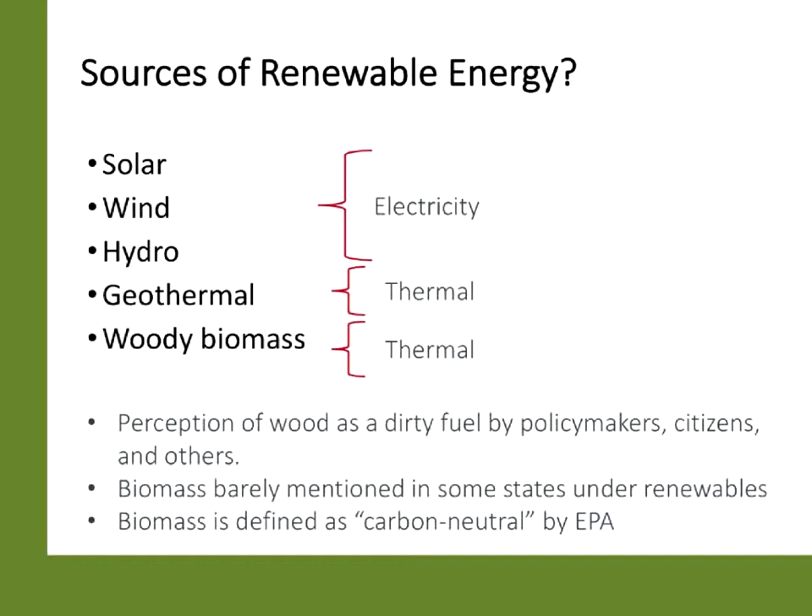So I have a question for you all, and I think Bob can facilitate this. Do you heat with any of the following? I encourage you to mark any of these if you do. I'm not sure if there was a poll actually set up on this or not, but these are kind of the options that many people pick from. So let me jump in here real quick, Jonathan. Yes. So folks, 1 through 5 is the same thing as A through E on the polling. So feel free to chime in using the polling process. Just curious, do you heat with any of the following, either as a primary or a secondary source of heat? To see a little bit of our audience, I will speak personally as a person who's burned firewood for about 40-45 years. A long-time wood user. So let's just see where our audience shakes out.

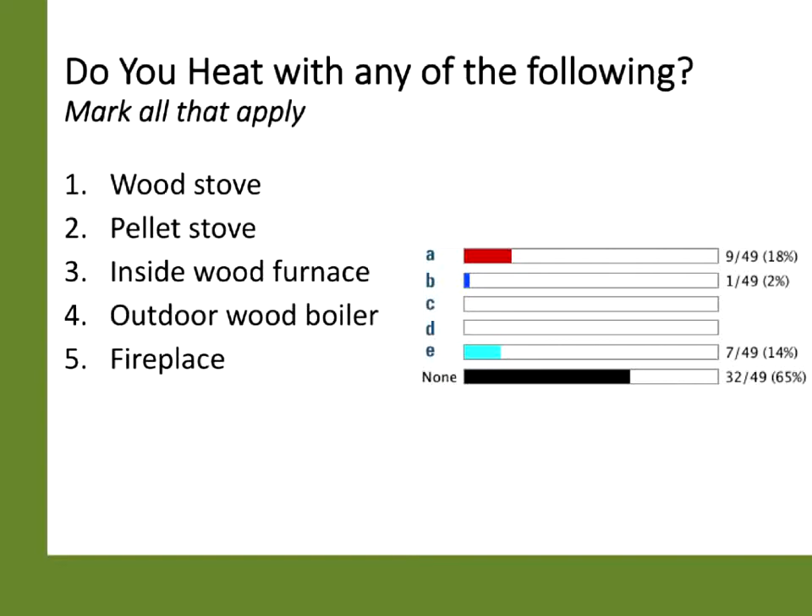A few people have replied. Of those that have replied, it looks like actually wood stoves or fireplaces, and a large number that haven't replied. I don't know if that means that would probably be none, maybe. So. That's interesting. So just curious to know about that, who our audience is. Okay. So let's move on.

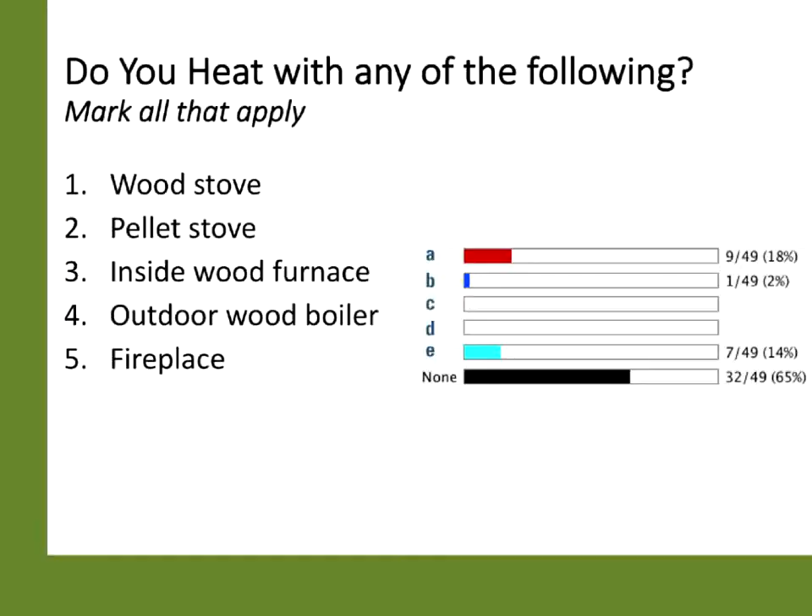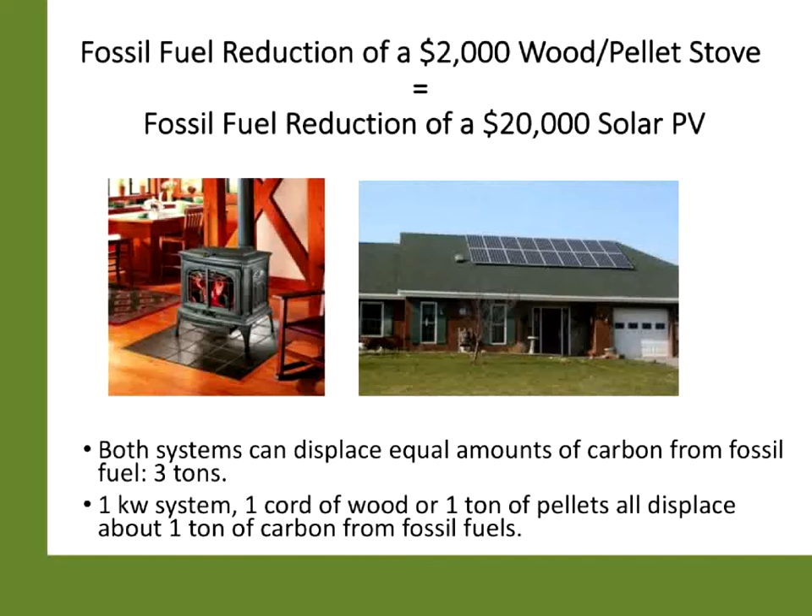This is a slide that comes from the Alliance for Green Heat, where we look at wood pellet stoves in terms of fossil fuel reduction. Basically very similar to that of a solar array, displacing equal amounts of carbon from fossil fuels. So I thought this was an interesting analysis that many times isn't thought of. Of course, it's a different type of energy. We're talking about electrical energy versus thermal energy, but still, wood energy basically has the capacity for displacing a good bit of carbon, as does solar PV. So what is woody biomass?

Well, it comes from a number of different sources. Of course, from native forests. In many cases, as a forester, much of your low-quality material is very suitable for woody biomass uses, for chips or for firewood. Sawmill residues typically are useful for pellets, wood pellets, and that's what they're typically used for. Very desirable material, in fact.

And interestingly, one of the largest sources of firewood, in many cases, is urban wood waste. I look around the state of Maryland, and many of the firewood producers are basically tree companies that are taking takedowns and using that to supply a good bit of firewood in the state. Short rotation woody crops, in this case, are just a very minor component of this.

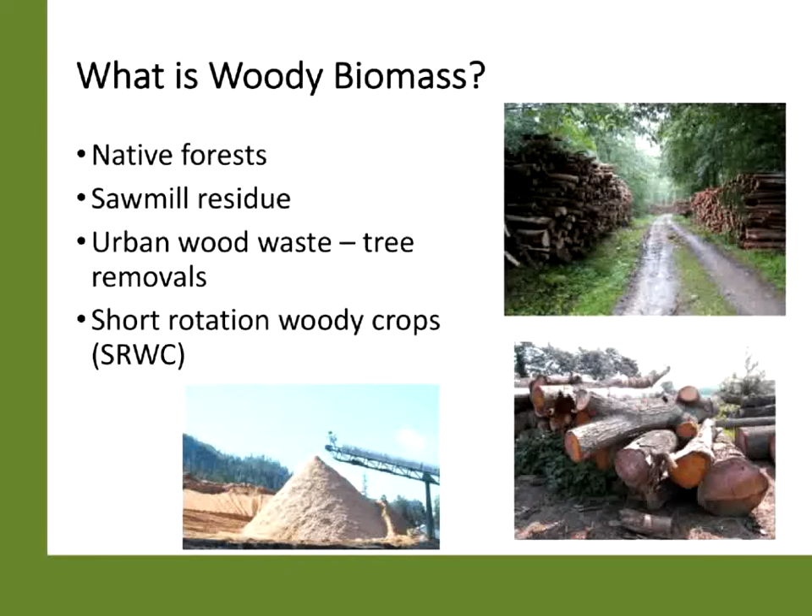So why is there increasing interest in wood? And I'll make the case that there has been an increasing interest in wood. And I think it's partly because there is a wood culture. There's no doubt that the ambiance and heat of a wood stove is something that's attractive to a lot of people. And there is a certain culture around people that heat with wood, if you've been involved with any folks sitting around a fire in the middle of the winter, that type of thing. There's also the economics of it in terms of saving money.

An interesting statistic is that 60% of people who heat with wood cut their own. So that's part of that cultural thing as well, people being engaged with what they're doing. And when you look at the heating costs of everything from propane to oil, the cost per million BTU, which is many times the metric that's used, how many dollars of fuel it takes to heat up a million BTUs, wood comes out as pretty much the lowest cost option that's out there.

Of course, a lot of people have access to free wood. Of course, everybody knows that wood is not free. Even though you may have some woods out there, you still have to take the time to go out and get it. And you have to have a truck and saw and all the other equipment that goes with it. So it's not necessarily free.

And there's this whole issue of heat security, which I think has resulted in many cases in some increases in wood stove use, because in many areas, people in rural or ex-urban areas on the grid, many times because of trees and hurricanes and everything else, if your heat goes out, you're really in rough shape. So having a wood stove is something that doesn't require any electricity. Augmenting a heat pump is a very common reason for having some type of wood stove in the house. And of course, just being environmentally responsible as well for many folks.

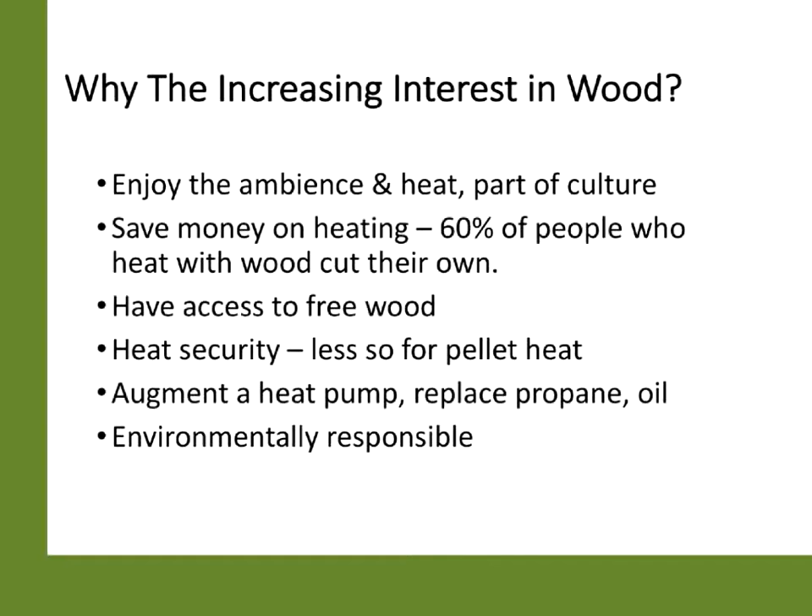So what are the types of residential wood stoves? Primarily, of course, we have freestanding wood stoves and inserts, wood stoves using firewood or cordwood as it's called. And these are the ones that are most difficult to control emissions, versus pellet stoves, where you have a standardized fuel, low emissions. We don't have many wood and pellet furnaces, at least in our part of the country, in the Mid-Atlantic area. That's more in the Northeast, where it's more economically viable.

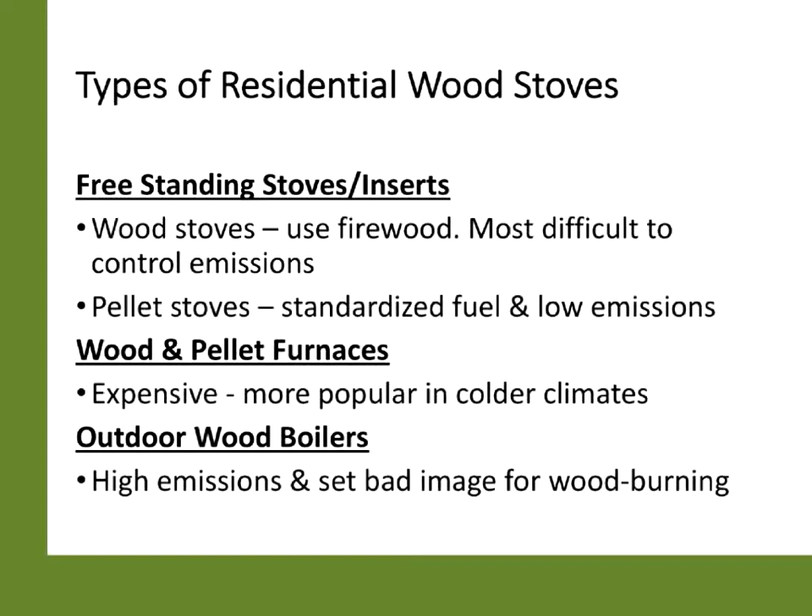But we do have a lot of outdoor boilers, and we'll talk about that a little bit as well. And I think this has been a problem in terms of the high emissions of the older boilers, in many cases setting a bad image for wood burning in general.

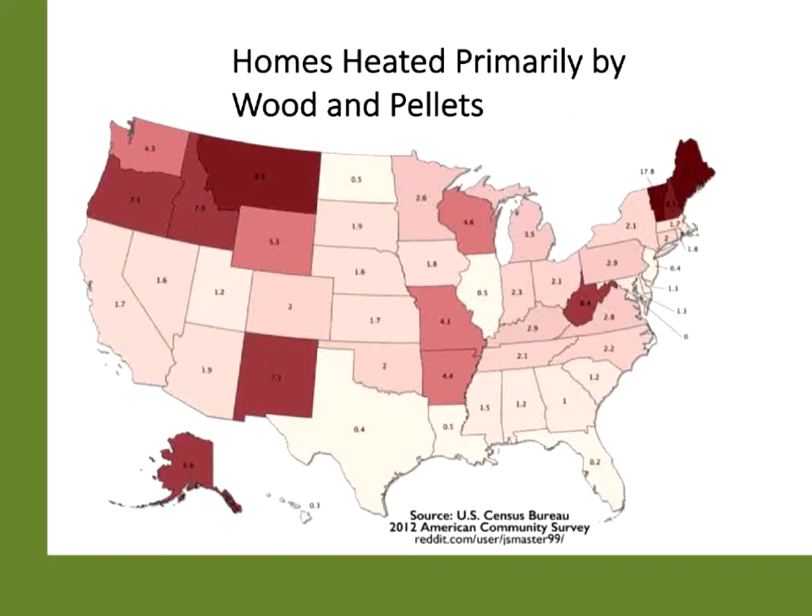When you look at census data, and this was again developed by the Alliance for Green Heat, homes heated primarily by wood and pellets, you see that these percentages are relatively low. Although in some parts of the country like Oregon, 7.1%, and up in the far northeast, Maine, 13.7%. For most people, primary heating with wood and pellets is not a high percentage. But when you look at certain parts of the country, very rural areas, some places really stick out. These are some high per capita wood heat households in various states around the country. And you see that they're quite high.

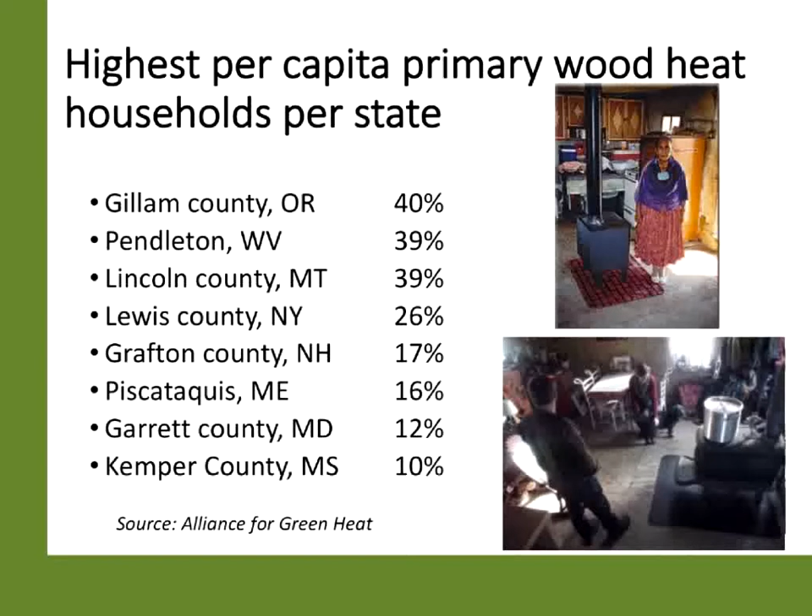Going up as high as 40% in Oregon for this one county and some other areas. Well, from census data, there has been an increase in residential wood heat use from 2000 to 2010. And you can see these increases are kind of indicated here. Of course, in the southeast, that's not as much the case, but you get up in many of these northern areas, you see increases in the residential wood heat per capita in the 20%, 20 to 40%, and even higher than that.

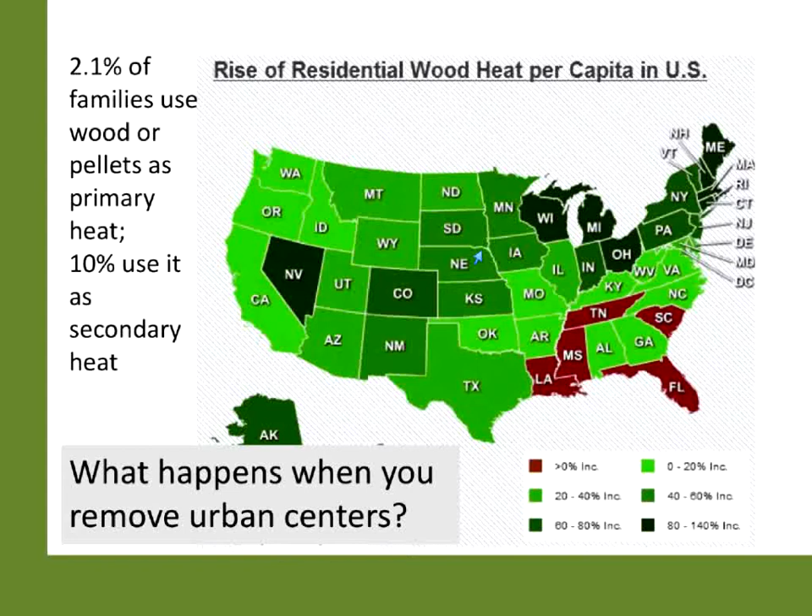And while 2.1% of families nationally use wood or pellets as primary heat and 10% as secondary, I haven't done the analysis, but again, this takes into account all your urban areas. And I think when you really extracted a lot of high population urban areas, you would see that wood use, even as a secondary or as a primary, is probably a lot higher than stated by these overall statistics when you include the entire population.

So one of the barriers to wood is wood smoke. And there's major problems with wood smoke in many mountain valley areas. It's resulted in not allowing certain types of wood stoves or requiring certain types of regulations to limit its use. There's been attempts to try and transition some of these users to pellet stoves, and of course, will those wood users that use firewood transition to pellets? And there's been a number of incentive programs that have been tried, and the question is, do they work?

Well, sometimes. The point here is, and I'll make the case later, that there are some real common sense things that can be done to minimize wood smoke, and many of these rely upon newer technology as well as proper seasoning of wood, for sure.

So prior to 1988, EPA was not involved in the certification of stoves. There was no EPA certification. In 1988, they required all stoves that were going to be sold had to have emissions less than 7.5 grams of particulates per hour. And that's kind of the metric that's used. That's a kind of a surrogate for overall emissions and all the gases that come with it. But this was a major change.

And so many of these companies basically stopped being in business. And you see a lot of these stoves around still because they don't rust away or anything. But Timberline and Fisher, these were companies that basically went out of business. And stoves at this point were just a big open box with a pipe in it.

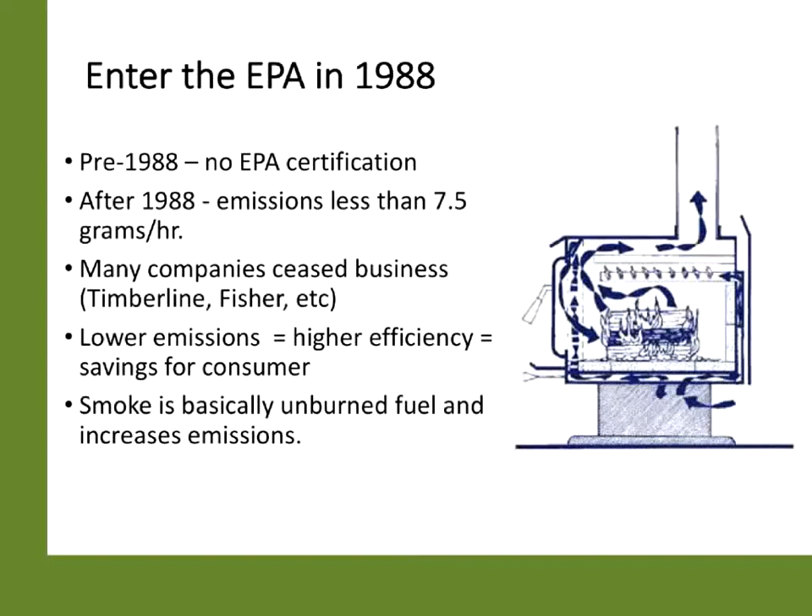So this is an example of a pre-EPA stove versus a certified stove that came after that. And the big difference, like I said, if you look at the old stoves, was a big chamber that went directly to a pipe out the smokestack. Maybe they were 30% efficient or something. They just didn't maintain a lot of the heat. You contrast that with the newer certified stoves, which basically work on a similar principle.

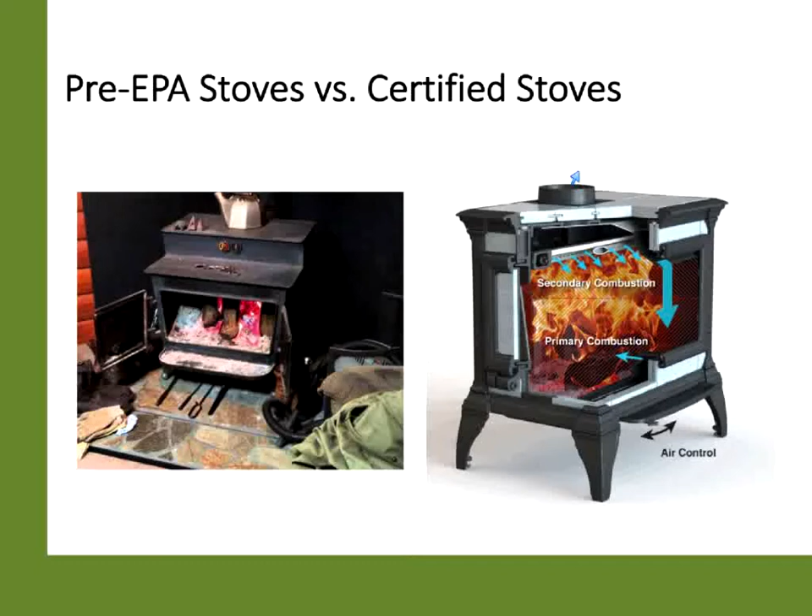You have some primary combustion going on, but then you have engineering that basically recirculates these gases back into secondary combustion that raises the temperature significantly. And the result of that is that it burns up all those remaining particulates, so it reduces the amount of emissions because those particulates have been superheated and combusted and finally make their way out the smokestack. Okay, so this is the basic idea of most certified stoves. This is secondary combustion.

After the certification, some of the companies that wanted to stay in business, and I know Vermont Castings had a number of stoves like this, decided to put catalytic converters in some of these stoves. And these work the same way that your car works. It takes these gases and things that create a lot of emissions through a catalytic combustor and converts them into water and carbon dioxide.

And the problem is that these were really not very popular with users because the catalytic converters were expensive to replace, and in many cases people would take them out rather than replace them, and you ended up with higher emissions.

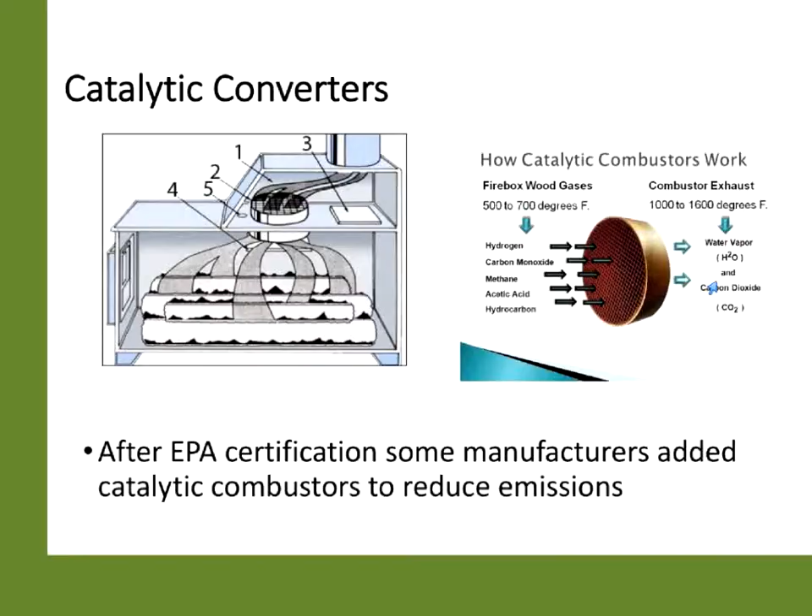So you still see the use of some catalytic converters, and some people are asking them to come back in some of the new hybrid stoves. So what is the effect of wood stove efficiency on fuel costs? Well, significant. And this is just an example for you right here.

If you look at three devices, here's a fireplace, which basically is about 10% efficient. In other words, you get about 10% of the BTUs of heat out of that for the wood that's put into it. And you had a non-EPA wood stove prior to 1988, maybe 40% efficient. Then you have a newer EPA stove, at least after 1988.

So if you have a cord of oak wood that you purchase for $150, the way most heat is calculated for a lot of these analyses is, what's the cost per million BTUs of heat to get out of that device? So a fireplace would be about $59 per million BTUs. And if you figure a house might use 50 to 70 million BTUs in the winter, that's going to take a lot of firewood to heat it with your fireplace.

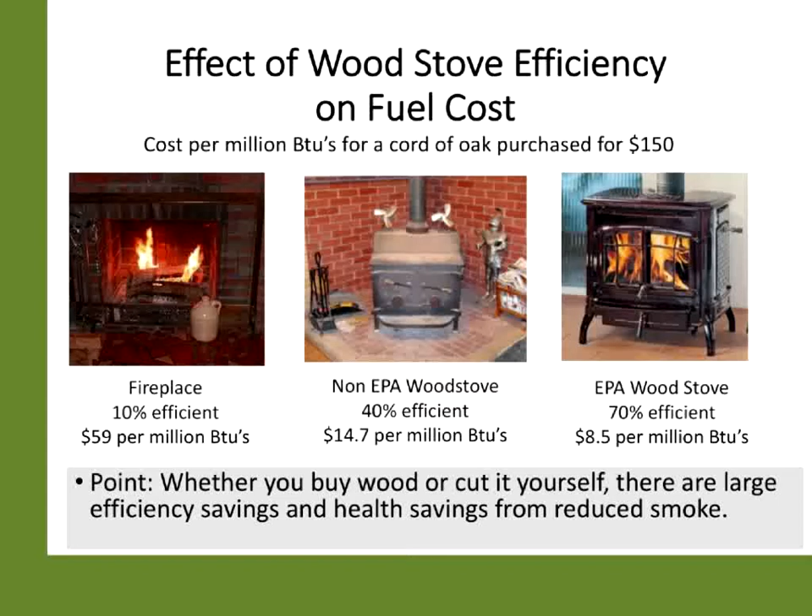A little under $15 per million for an older wood stove, and 8.5 for a newer one. So the point is, with higher efficiency, you're saving a lot on the fuel that you have to put in it. So even if you're cutting it yourself, there's large efficiency savings, not to mention health savings and environmental benefits because of the reduced amount of particulates in the environment.

Well, the real point here is that EPA started certifying stoves in 1988. The problem is that those stoves don't go away. And what this graph shows here is if you look at older wood stoves pre-1988, this bar shows that about 50% of the stoves that are out there and in use now are these old, outdated, polluting stoves.

And you can see with this green square that the grams of particulates per hour is somewhere around 25, which is literally more than 3 times the level for the EPA certified stoves starting in 1988. And only about 31% of those stoves are the newer stoves. And of course we have pellet stoves and some other boilers.

But the problem here is that a lot of these stoves are out there. So how do you get these stoves out of there and replace them with newer ones? That's a big challenge. And the real problem there is, like I said, these stoves are made of steel. They just don't go away. So people stop using them, they buy new ones, and in many cases that older stove ends up somewhere else, which is not ideal.

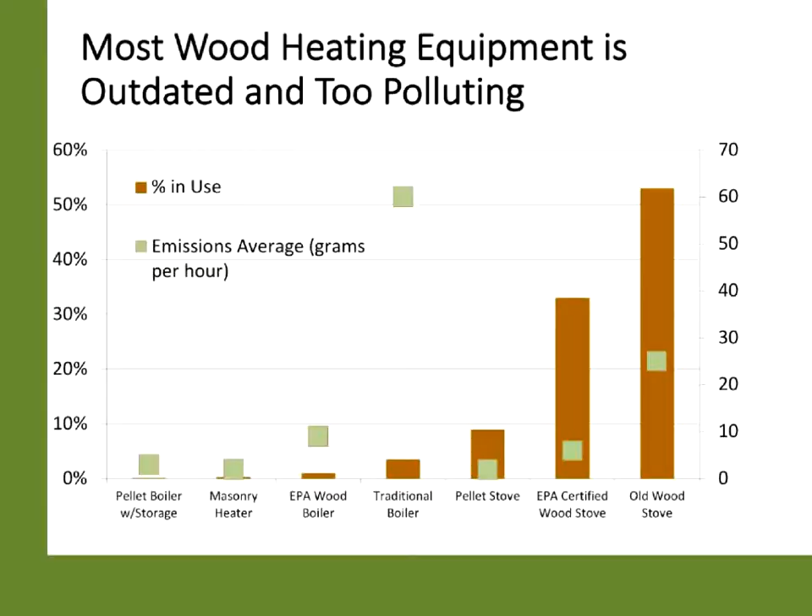So let's look a little bit at pellet stoves. They've come a long way. Some people here may have pellet stoves they purchased back in the early 90s when they first started coming out. And you had a gel you had to put on there and light it and that kind of thing. It was kind of messy, and they've come a long way from that.

The stoves that are on the market now, especially the higher-end pellet stoves, they light themselves, they put themselves out, they have thermostats. All of these are easily under 2.5 grams per hour, which, as I'll bring up in a minute, is the new EPA standard.

And the best thing about pellet stoves is they can be put pretty much anywhere, because unlike a wood stove where you need a chimney to be able to handle temperatures of 1,000 degrees or more, all you really need for a pellet stove, as you can see right here, is a little 4-inch or so vent pipe, and that can go out through the exterior wall. So it allows a lot of flexibility in where pellet stoves can be installed.

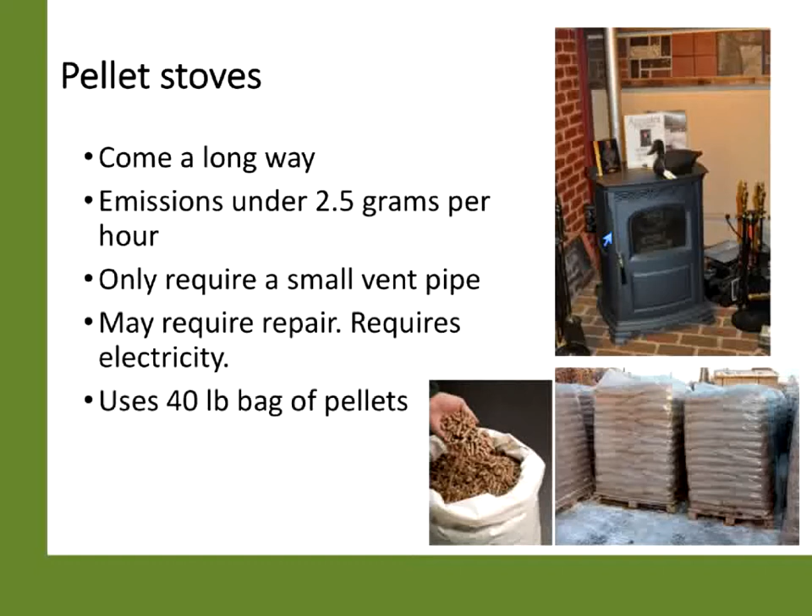They do require electricity, so if you're buying it for energy security, you have to have a backup battery of some sort. So that's something to think about. And one of the biggest challenges, I think, for the pellet industry at this point is developing better backup systems that will sustain them. And of course, we're using 40-pound bags of pellets for the most part. You usually buy them by the ton.

So how does a pellet stove work? Well, very simple. You have these pellets. You put them in a hopper. Typically, they'll hold one or two 40-pound bags. You have an auger here, which twists around, meters out the pellets, brings them into a combustion chamber for the controlled combustion. You have a grate here where the ash falls through, and then you have a fan which kind of blows the heat back into the room.

So the biggest problem with many pellet stoves is clogging on this grate. And it's very important to use pellets that have less than 0.5% ash. And also the engineering of the stove. The better engineered stoves just don't clog. And that's probably one of the differences you want to be concerned about if you're looking for a pellet stove and you're reading reviews.

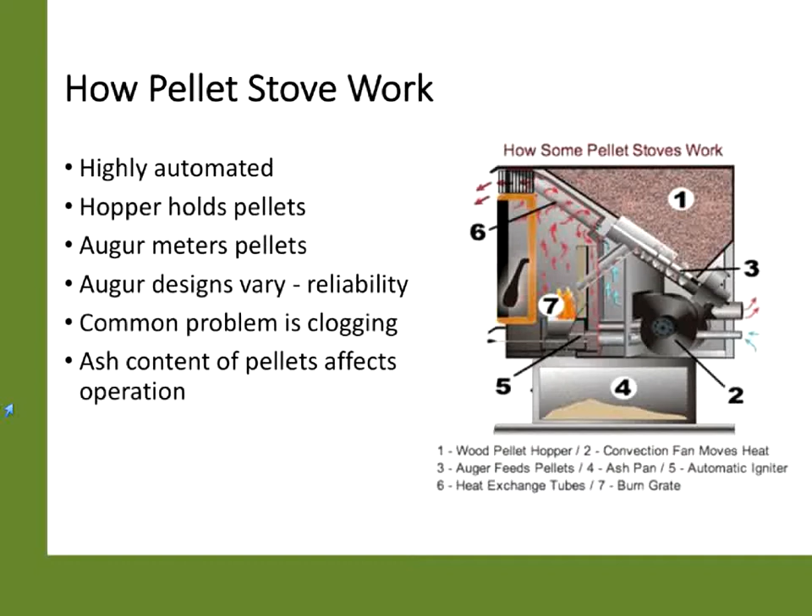Because if it gets clogged, you have to turn the stove off and clean it out, and that's kind of a mess. The good thing about this is you only dump the ash. It's very little ash, because pellets are basically very densified wood material, and there's very little ash to mess around with, unlike with wood heat.

So wood pellets, there's a big difference in quality. The industry has been called upon, I think, by actually EPA or others to standardize their pellets. And so for the most part, you'll find pellets, premium pellets, super premium pellets. I think the most important thing for residential consumers is to know that most stoves require pellets that have less than 0.5% ash.

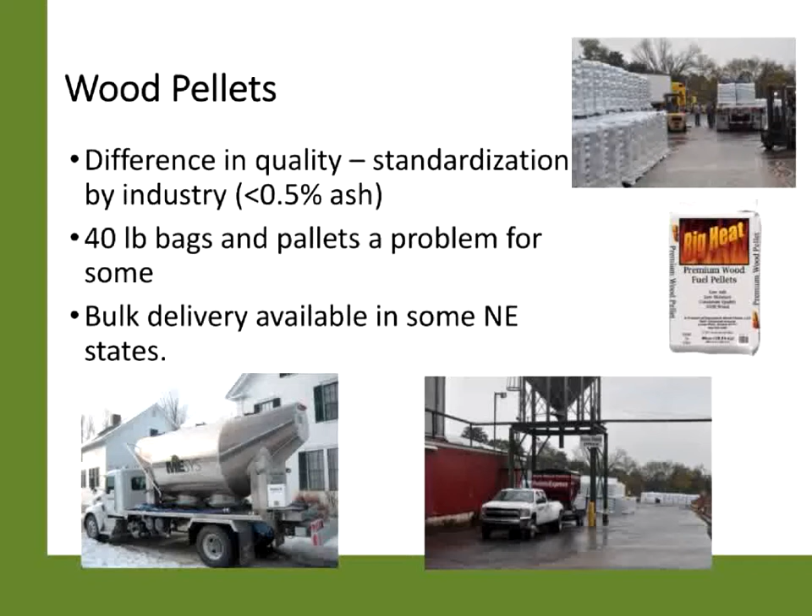And most pellets are sold in 40-pound bags on a pallet. One pallet's about a ton, and an average person probably uses 2 to 3 tons a year. And the bags are a problem. In many areas, there is bulk delivery, using like a grain truck of some sort. There are some places in Pennsylvania here, but it's not very widespread outside of the Northeast. And you have to have a certain number of people out there using it.

And in most cases, many of these people that are using bulk pellets basically have an inside pellet boiler like you see here, and they have a hopper in the basement which is loaded with wood pellets, just like you'd get oil delivered. And this is probably some big change in the pellet industry at some point that will help advance it further in areas where you can get away from bags for the most part.

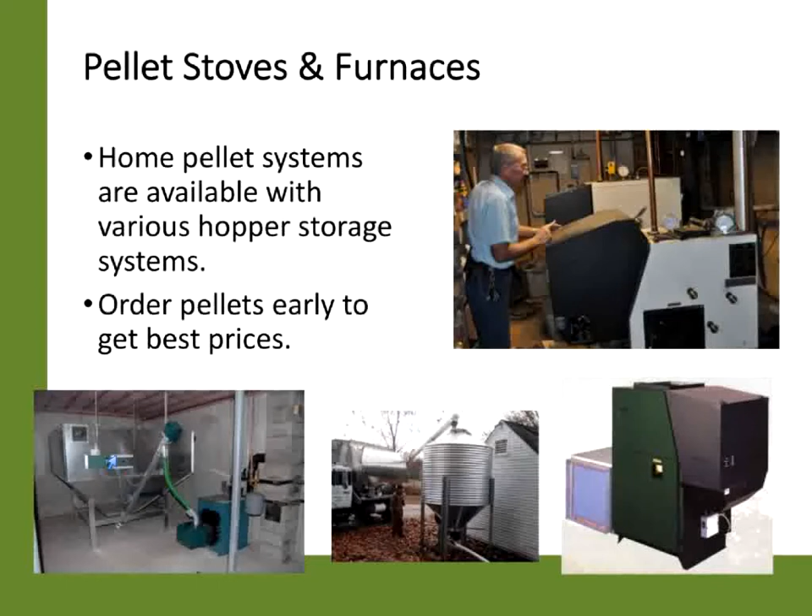But whether that's going to occur for most folks in the residential markets is hard to say, but it is more common up in the Northeast and other areas where you have colder winters and you can justify indoor wood boilers.

So the big change that's occurred right now is that, like I said, in 1988, all wood stoves had to have less than 7.5 grams per hour of particulate emissions. Come the new source performance standards with EPA, starting in 2015, all wood stoves had to have less than 4.5 grams per hour of particulate emissions. The lower the particulates, the lower emissions, the cleaner the air coming out, and the less air quality issues. Many wood stoves at this point actually meet that criteria.

The real challenge is that as part of these standards, starting in 2020, the emissions limit is going to be 2 grams per hour if you measure it using a test that uses cribwood, or 2.5 grams per hour with cordwood. And most people don't know that a lot of tests that are done for emissions with EPA are done using basically cribwood. It's kind of like 2x4s. And there's a big move to use cordwood, which is more representative of the kind of wood that's out there.

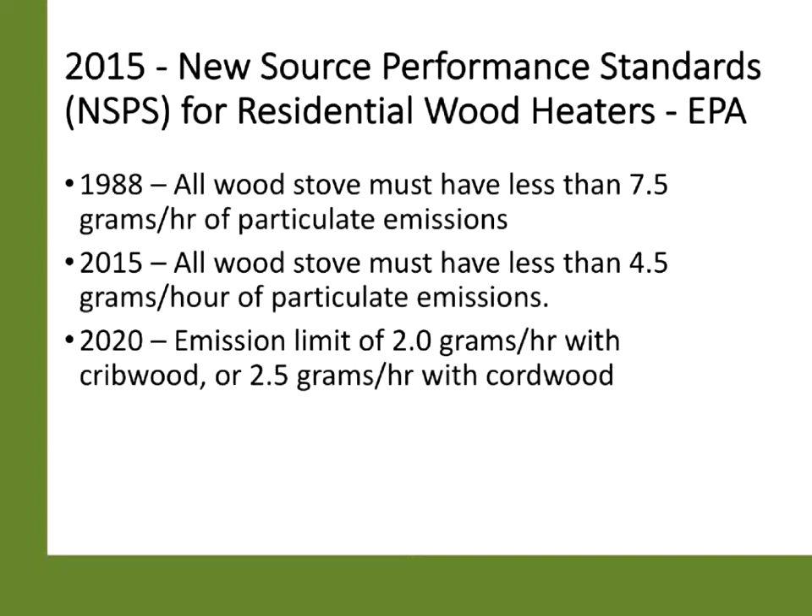So the point is that pellet stoves really don't have a problem meeting this limit. It's wood stoves, and it's an extreme challenge because of all the uncertainties. The other thing the new standards require is that all stoves' efficiencies have to be verified. In many places you went out to buy a wood stove, you'd find the number of BTUs it performed or the efficiency. And these claims are really not backed up by reliable test data.

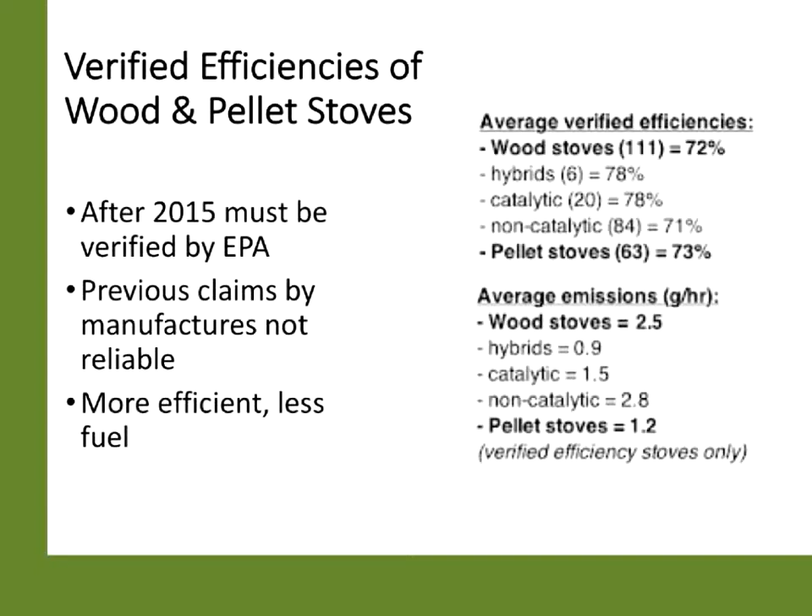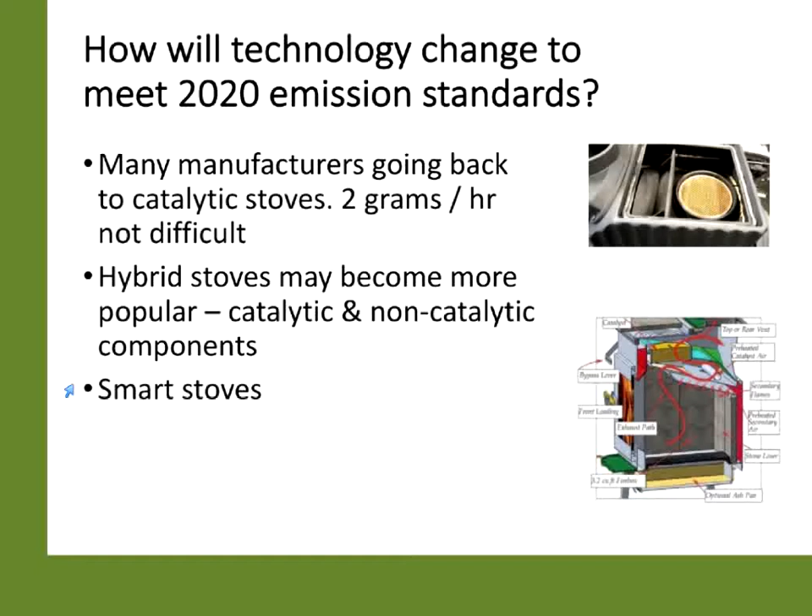Well, with wood stoves, how you start the fire, whether you have the flue open far enough, how seasoned is the wood, all that kind of thing. Smart stoves are basically using computer technology and sensors and things like that to address that. And I'll mention more about that later.

So there's a lot of positive changes I think that will come out of the EPA regulations. First and foremost is disclosure of efficiencies based on real data. And because this is real data, you can't just make the numbers up. I think companies, of course, are going to be striving for higher efficiencies to compete with each other. And I think it's just going to help the consumers in the long run save more money because you're getting more BTUs for the same amount of inputs, whether it's pellets or it's wood.

Again, the disclosure of real BTU output, that's always been a cause of concern in terms of advertising. And all stoves have to be certified even to be sold. In terms of outdoor wood boilers, they are a real culprit, especially older ones, with regards to emissions. And I'll mention this in a minute, but it's going to reduce the emission limits, especially starting in 2020 for outdoor boilers, and it's going to make it very difficult. It's going to eliminate a lot of the worst actors in terms of high emissions in the markets. And like all things, hopefully spur innovation as well amongst different competitors.

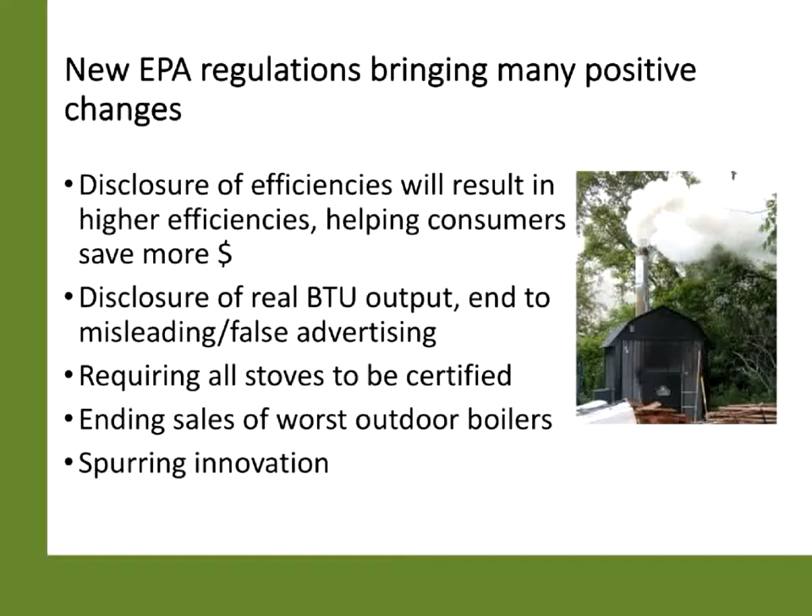So what about wood boilers? Many wood boilers, the older ones, have very high emissions. So outdoor wood boilers, this is like 161 grams of particulates per hour. And you contrast that with the newer EPA outdoor wood boilers, which now have to be sold. You can't sell these other ones really, in most places anyway. You're down to about 18. So you can see this is a magnitude of difference. This is basically a whole decimal point for the most part. So you can see how the newer EPA outdoor wood boilers are much more efficient and have much lower emissions. So that's a real positive thing.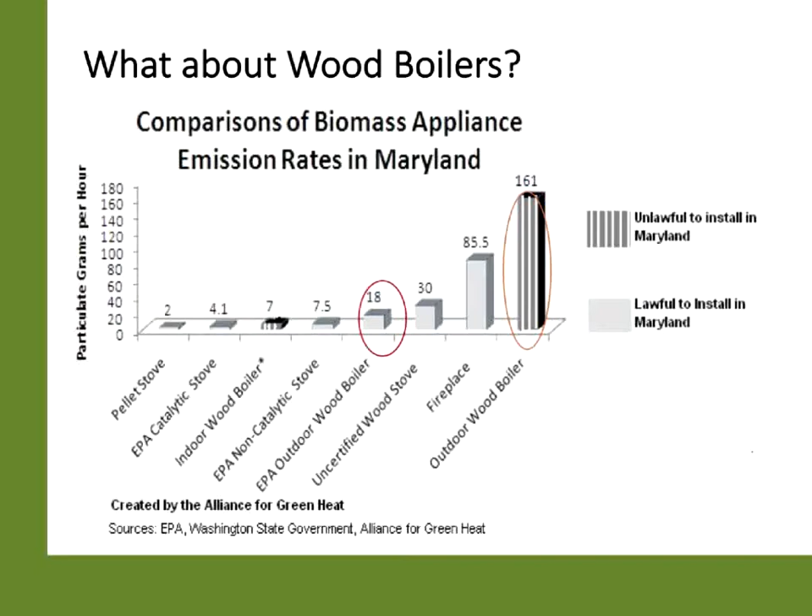So let's just talk about that for a minute. Outdoor wood boilers are known, in a regulatory sense, as outdoor hydronic heaters. And so starting in 2015, the newer EPA, they used to be called Phase 2 outdoor wood boilers, are the only ones that can be sold in most places. That's been changed to Step 1. And this is a picture down here of one of the newer Step 1 boilers. And the difference between this and the older outdoor wood boilers is the old outdoor wood boilers were kind of like the old pre-EPA stoves.

You had a big combustion chamber. You could burn anything in there. You could throw whole logs in, cow parts or bones, whatever you want to throw in there. These newer ones are not. They basically will only work if you have seasoned wood. Otherwise they just don't work correctly. So this is a major change, and of course it's resulted in much lower emissions.

What happens in 2020 is that outdoor wood boilers are going to have to meet even stricter emission standards. I'm not providing the numbers here because we don't have to mess with that right now, but the point is that it's going to be very hard for the outdoor wood boiler industry to meet those standards. Very difficult with the technology that's available.

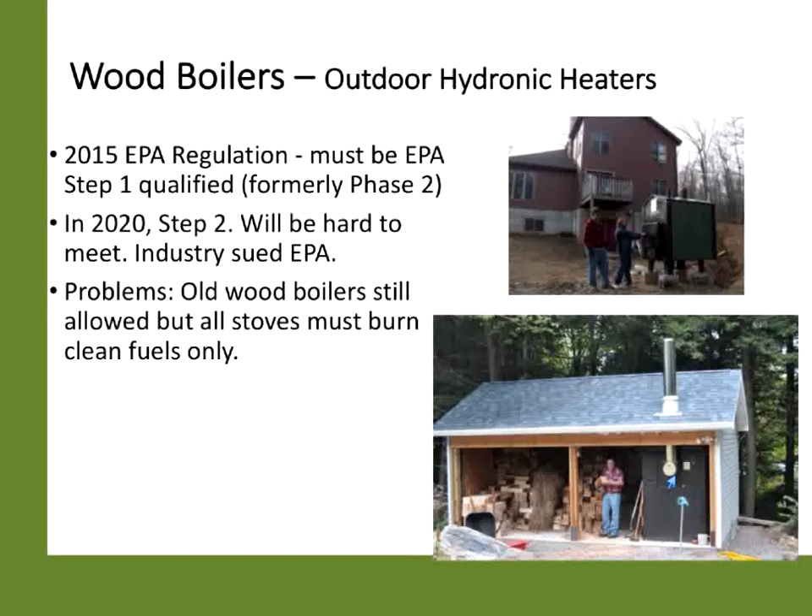And it's very challenging, even with the incentive program, because these are very expensive things. They cost $10,000 to $15,000, and to replace them is no small bargain for sure. But most of the new regulations do require they can only burn clean fuels. But then again, there's changes in the industry that will occur in 2020, and the idea is to change the polluting image of the outdoor wood boiler.

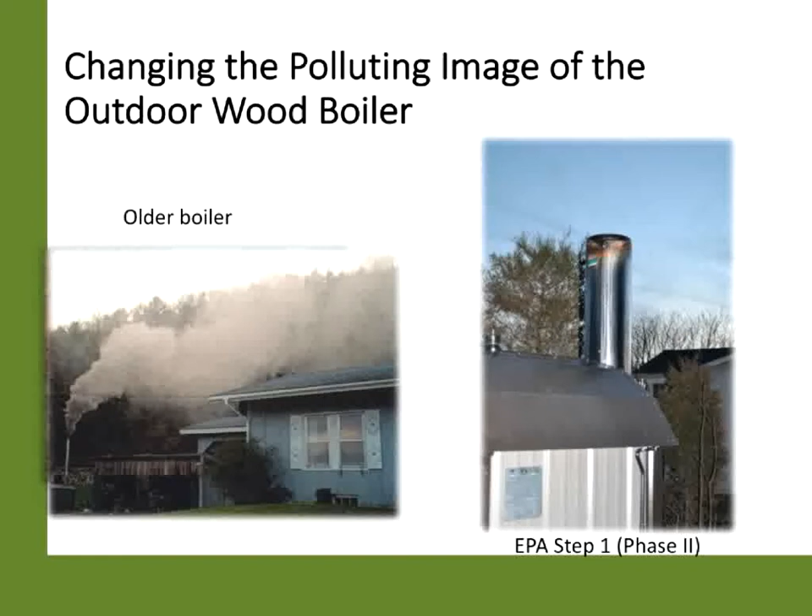So this is one of the older boilers, and this is an EPA Step 1 or Phase 2 boiler. It's running, and you can see, when it's run properly, very few emissions, much less emissions coming out of this, which is what we're working for. And of course, the Phase Step 2 boilers will even have less. We did some research in outdoor wood boilers and tried to come up with some best management practices. And basically, they're listed right here, and they're on the fact sheet on our website.

But when you're sizing a wood boiler, and they come in different sizes, you don't want to size it for the coldest day of the year, because that means it works at much lower efficiencies most of the year. So you want to make it a lower amount for the more moderate temperatures, and realize in the coldest days of the year you may have to use some additional heat source. But this is where you're going to get higher efficiencies out of a wood stove boiler.

And you want to minimize distance from the stove to the home, because that pipe goes underground. Usually it's heavily insulated, but even so it loses heat to the ground. In some of the work that we did, depending on the level of insulation, 10 to 20% of the BTUs could be lost underground. So of course, the longer the distance from the house to the stove, the more potential loss of BTUs. You have to bury and insulate the water transfer lines. There's some very good insulating materials out there these days.

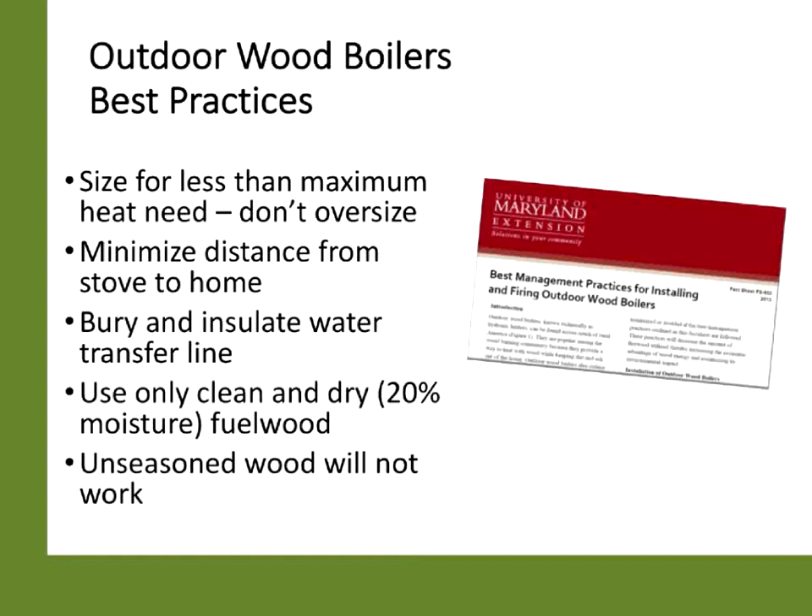And using only clean, dry, low-moisture fuel wood, for sure. On these new Phase 2 Step 1 boilers, unseasoned wood will typically not work. In many cases, in fact, I know Central Boiler is one company, I think they actually have an auxiliary propane system, so in case it does go out, you can relight it. So obviously that's a problem.

So let's move on a little bit, just talking about how these EPA regulations have changed things up till now. And again, this is some information I got from the Alliance for Green Heat. Of 514 wood stoves on the market, 17% are now certified to meet the 2020 emission standards. I think others are developing as we go along. So there's a little ways to go for some of the wood stoves. And interestingly, some of the larger manufacturers with the most stove models are having a tougher time meeting those limits, primarily because they have a lot of different stoves and a lot of different engineering that has to be done.

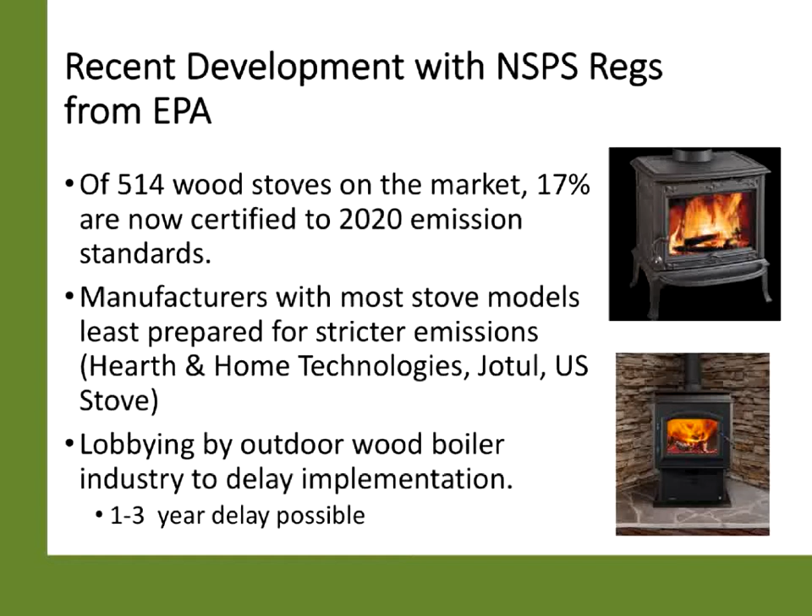And the interesting thing here about the outdoor wood boiler industry is there's some serious lobbying going on right now to delay implementation, perhaps from 1 to 3 years, so they can have more time to develop the engineering to meet the lower emission standards. So we'll see what happens with that.

So, question, and again, this would be A, B, C, D, E, F, G. What would motivate you to buy a clean burning wood stove? I'm just curious. What would be the main thing that would motivate you to buy a clean burning wood stove? I'll just give you a minute if you would. I'll ask Bob if he could put up the appropriate thing. There you go. Okay.

So while people are doing that, real quick, Jonathan, there was a question. They were asking about the emissions you're referring to: PM10, PM2.5, NOx, or other pollutants. I think it's 2.5, I believe. I believe that's what it is.

Okay. So again, we got a few people to answer. Seems like a monetary incentive, money is always good. So that's a good thing. Very few, a cold family member doesn't carry a lot of weight, doesn't look like to me.

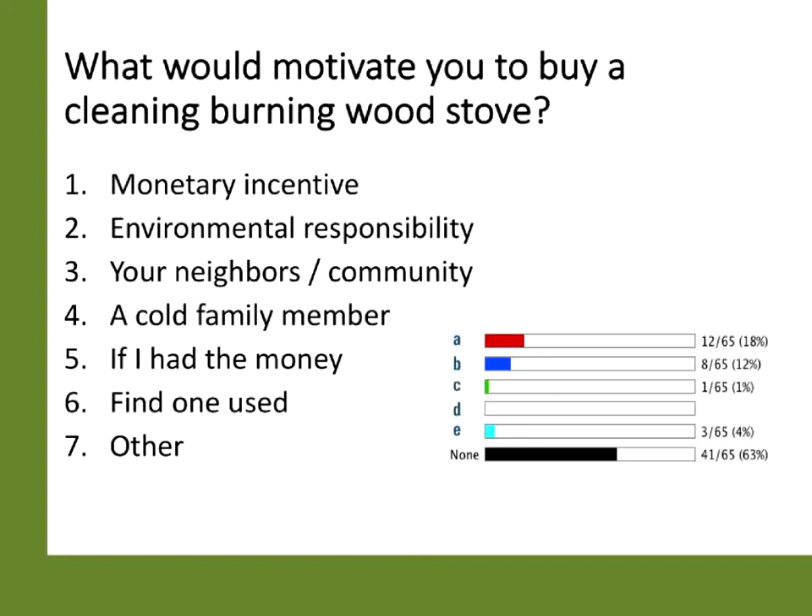So let's move on a little bit to talk about strategies used in a lot of states with change-out programs to try and provide some money for folks as an incentive to put towards buying a clean burning wood stove. And in 2016, there were 35 such programs. The average incentive was about $900 to replace a wood stove, $1,300 for a pellet stove.

In Maryland, there is a wood grant program. It's been around since 2012, actually thanks to the efforts of the Alliance for Green Heat working with the Maryland Wood Energy Coalition. Over 5,000 stoves, and the majority of those are actually pellet stoves. The incentive there is $700 for a pellet stove, $500 for a wood stove. So these are one way to encourage homeowners and users to buy a new up-to-date stove and get rid of the old one, especially if it's a pre-1988 stove.

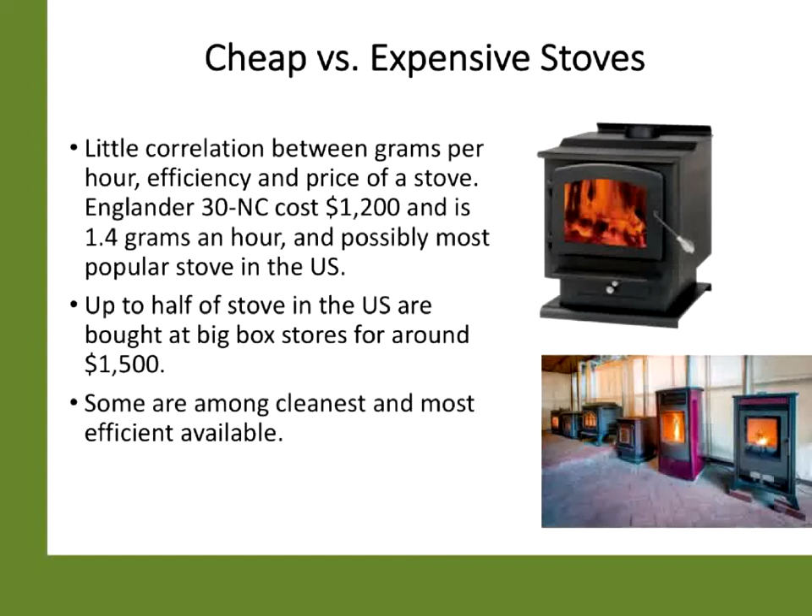Let's talk a little bit about automated smart stoves. The Alliance for Green Heat had a wood stove decathlon back in 2013 to test a bunch of different entries competing for lower emissions and things like this. That was on the National Mall in 2013, and it will be again this November of 2018. And I'll mention that when I get done here.

One of those contestants, a group of engineering students from the University of Maryland, developed an automated smart stove. Basically, you put the wood in, it takes care of all the burning. You have a phone app, very high efficiencies, very low emissions. These stoves are relatively expensive compared to some of the others, but this is the start of this whole automated smart stove movement to try and take the user out of the process. And so we can reduce emissions with wood stoves.

I'm going to move past this for a minute in the interest of time, but no, actually, that was the one I wanted.

Public opinion, anti-wood burning regulations. There is a lot of public opinion in certain areas that doesn't like wood burning, especially areas where you have mountains and valleys. But it's fair to say that the wood pellet movement is really helping public opinion. A lot of people like the idea of wood pellet stoves because they're automated, you can easily buy standardized fuel, and they have low emissions.

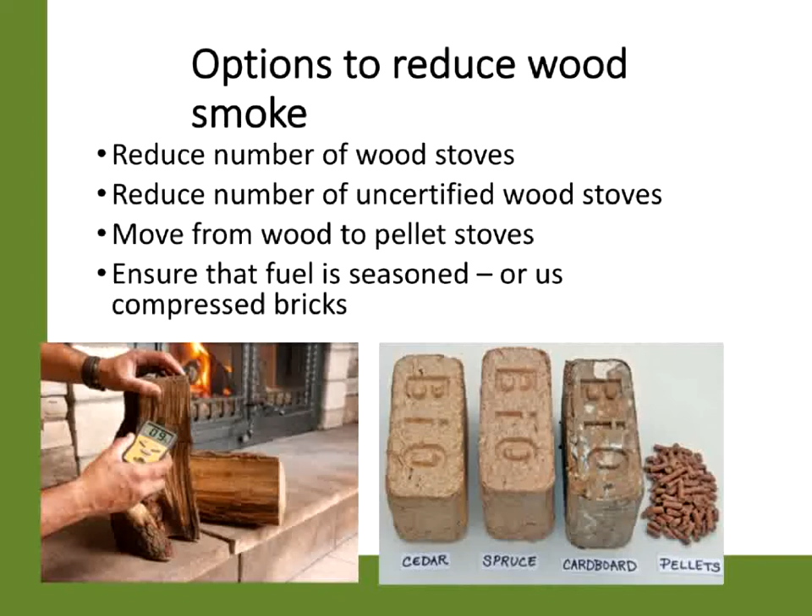There are some options to reduce wood smoke: reducing the number of wood stoves, obviously, reducing the number of uncertified stoves, moving from wood to pellets, and perhaps most important, ensuring that the wood is seasoned or using compressed bricks, which are also available on the market now.

So I want to take a minute to talk about firewood and this whole issue of seasoning, because this is really the crux of the problem with wood stoves, a lot of it is the seasoning of wood. And 60% of wood users cut their own wood. And it takes at least 6 to 12 months to season wood to 20% moisture.

And the question is, how do you know what 20% moisture is? Well, you see this little thing on this wood moisture meter on the right. These cost about $20 to $30, and I recommend anybody burning wood, processing their own wood, to use one of these and split the wood that you want to use and see what the internal moisture is.

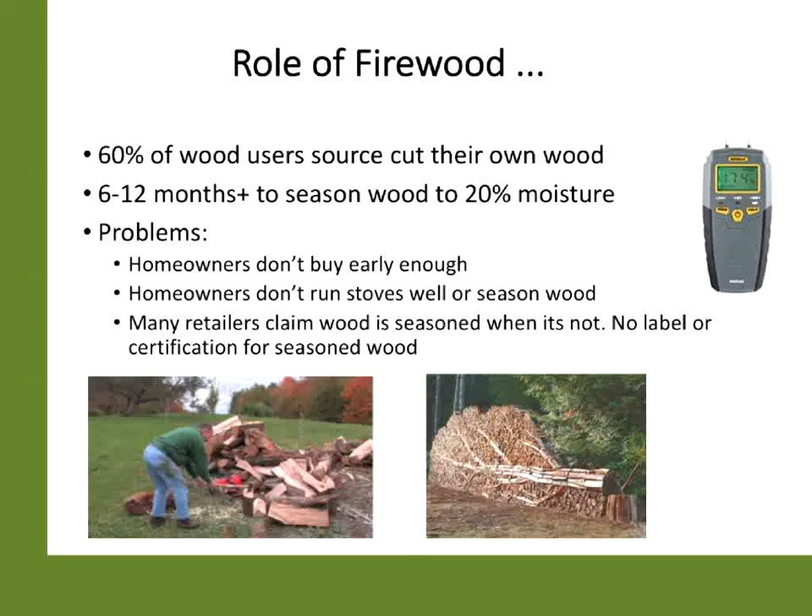Because the problem is that homeowners don't buy early enough, they don't run their stoves well or use seasoned wood, and many of the retailers that sell firewood really don't know what seasoned wood means, and there's no real certification for it. So it kind of creates this real problem with what is seasoned wood, how do you get a reliable source of it, and I would suggest that having your own moisture meter to test it takes out some of the guesswork.

So again, hardwood requires 6 to 9, in our area maybe 12 months after it's split and covered. The point here is that a lot of people think, well, if you just cut the wood into rounds and leave it, it'll dry out. Wood does really not start to dry until it's split. And then you get all that surface area exposed, and that's when it starts to dry out. So that's an important thing to remember.

And also, when you're burning wet wood, you're getting fewer BTUs out of it, because a lot of that heat that comes from the burning is actually being used to evaporate off the water, and you're getting less heat, but you're also getting the production of a lot of nasty emissions as well, and creosote and things like that. So if you are storing wood outside, you want to have it covered just on the top to keep the rain off it, but you want it open on the sides so that air can get through it. And so seasoning is a real critical thing.

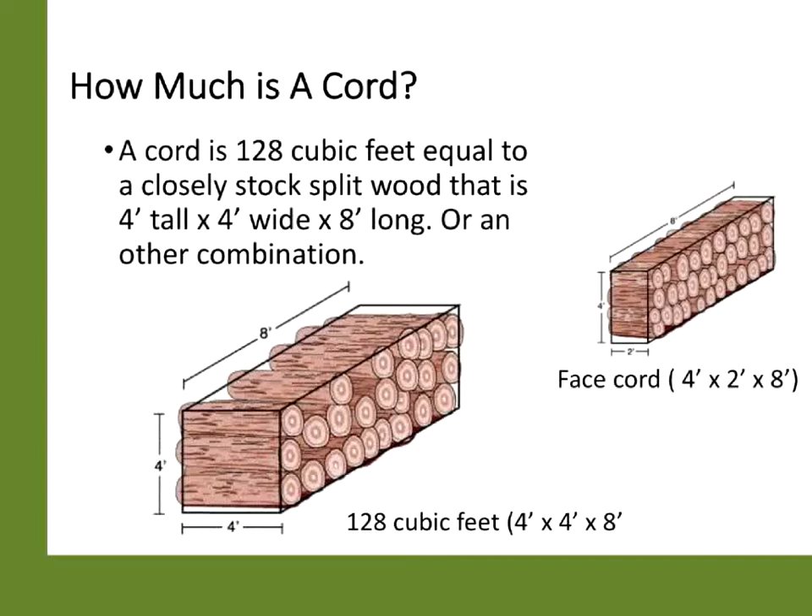I'm going to go past that, but how much is a cord? 4 by 4 by 8 long. A face cord is basically half of a cord, 4 by 8 by 2 feet deep. Many people don't know what a cord of wood is, and they buy wood. So if you are buying wood or working with people that are buying wood, it's important to educate them. How much is in a cord of wood?

And this is kind of a pet peeve of mine. If you call somebody up to deliver some wood, how much does wood weigh? Well, red oak, green, is about 5,000 pounds. Even at 20% moisture, that's 3,500 pounds. So if they're going to deliver the wood with a half-ton truck, can a half-ton truck deliver a cord of wood? I would say no, because a half a ton is maybe 1,000, 1,500 pounds. So, just use some common sense.

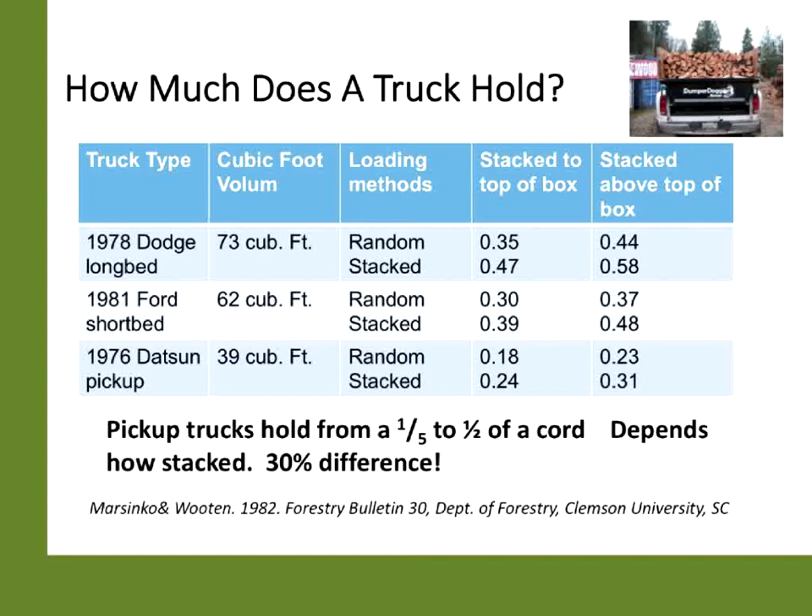When you're buying wood, ask what are they delivering it in? Is that really going to be a cord of wood? And how much does a truck hold? This is an interesting study from Clemson in 1982, where they took Dodge long beds and short beds and an old Datsun pickup, and stacked wood in them randomly and stacked. With a long bed Dodge truck, even stacked above the top, you're getting a little more than a half a cord. For a small Datsun pickup, analogous to a Ranger or Frontier now, maybe a quarter of a cord. So recognize how much wood a truck holds, so you know whether you're getting a good price.

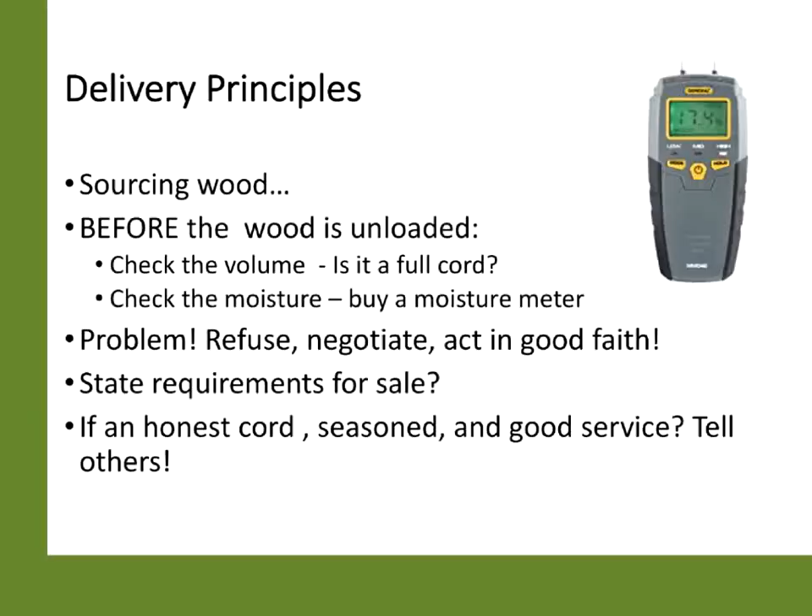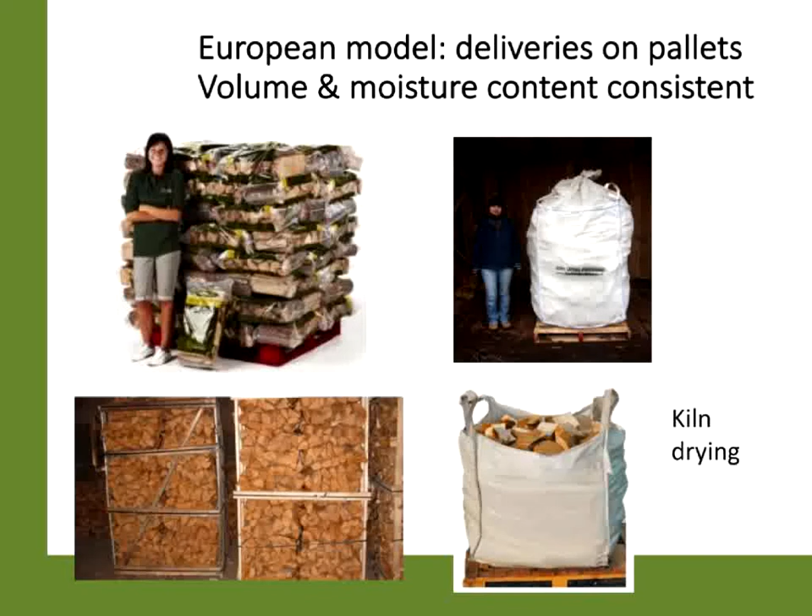And there is a lot of work going on with kiln drying of wood, and that's becoming more common in some of even the larger firewood markets around here. It's very popular in Europe. That, of course, solves a lot of those problems, and it's going to be dried down to the proper moisture level, but you're probably going to pay a little more for it.

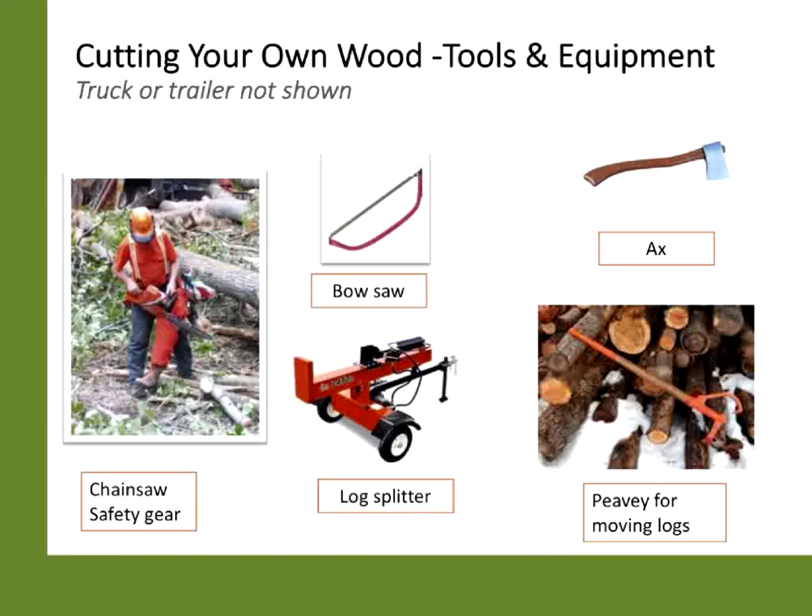And cutting your own wood is very popular these days. This does not include the truck or the trailer you own, but it takes a good bit of money to cut your own wood. And these are a couple of tips for chopping your own wood.

Never park downhill of the tree you're cutting. When in doubt, park twice as far from the tree as the tree is tall. Just because you live within a driving distance of a forest doesn't make you a lumberjack. And perhaps most important is always use your neighbor's truck. So I thought that was just funny.

So to finish up, unlike a lot of other industries, there's not really any real firewood associations out there. There's been efforts to do it. So you don't have a lot of best practices. You don't have a lot of industrial integrity in many cases. That's why I say if you find a good, reliable retailer or provider, make sure you recommend them to others.

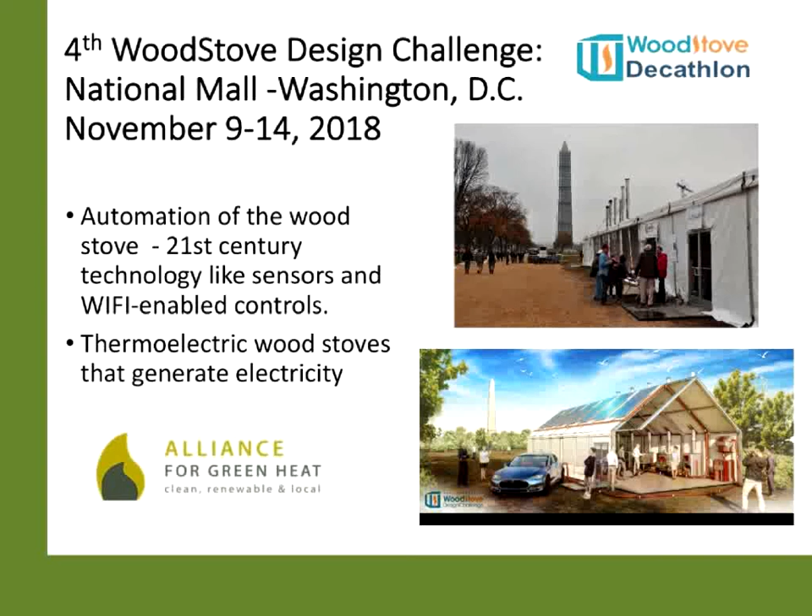But finally, I just want to mention for those of you who are interested that on the National Mall, November 9th to the 14th, the Alliance for Green Heat is going to be sponsoring a wood stove design challenge. And they have all these contestants that have entered stoves, new designs and things like that. And they're going to focus on two things: automation, so smart stoves with sensors and Wi-Fi and things like that, and then producing thermoelectric electricity from wood stoves as well. And it's going to be over the course of this week. I encourage you to come down if you're in the area and check it out.

So with that, the best thing to do probably to remove polluting stoves is by encouraging buyout or incentive programs. We need to improve seasoning of wood by all. Buy a meter. We need to improve professionalism of the firewood industry and how it works with consumers, I think. And we need to market pellet stoves as clean and efficient. We have the best practices for outdoor wood boilers, but there's a lot of partnering that's, I think, necessary to educate users, especially new users, to the use of firewood. And hopefully some of this new technology will help reduce some of those problems with wood stoves.